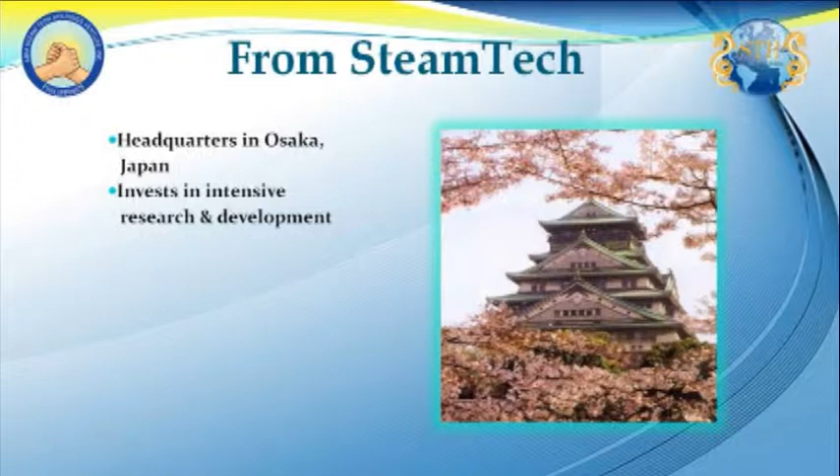From SteamTech, our headquarters is in Osaka, Japan. We invest in research and development to come up with excellent products which can help maximize the efficiency of your daily operations, and environmental problems will be addressed as well.

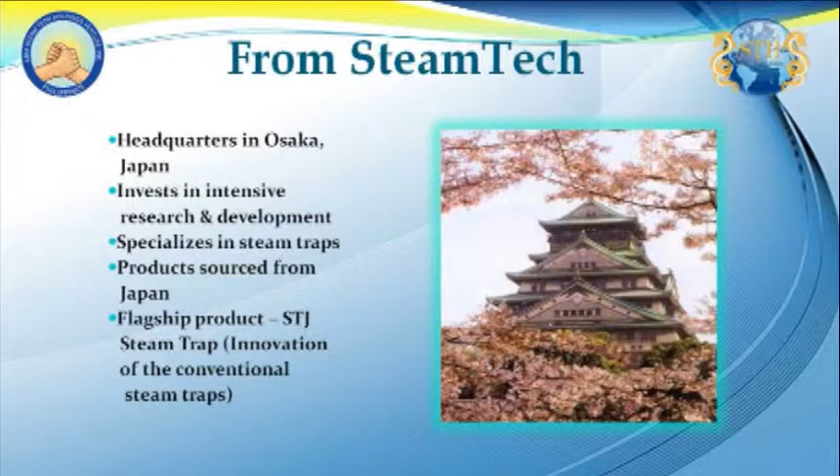We specialize in steam trap. Definitely, the product is being sourced from Japan. Our flagship product is STJ Steam Trap, the innovation of conventional steam traps that are being used in industrial settings nowadays. To begin with, we would like to give you a basic idea where the steam traps are being used.

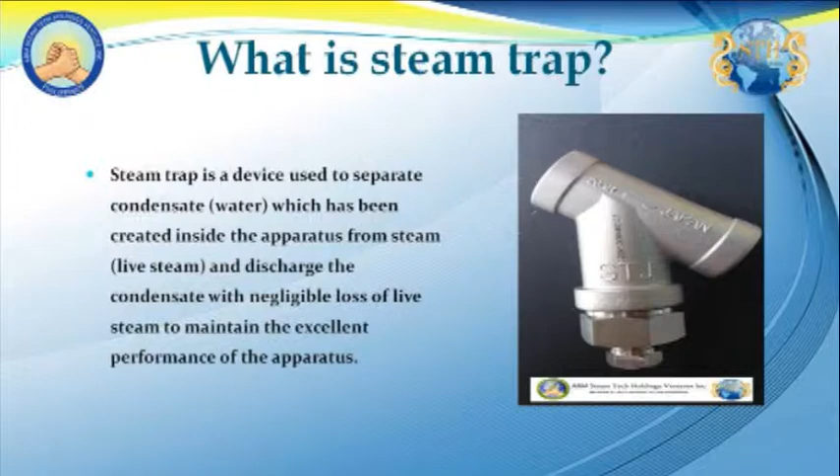First, we need to define what does it mean by steam trap. Steam trap is a device used to separate condensate or water which has been created inside the apparatus from steam or live steam, and discharge the condensate with negligible loss of live steam to maintain the excellent performance of the apparatus. Where can we find steam traps?

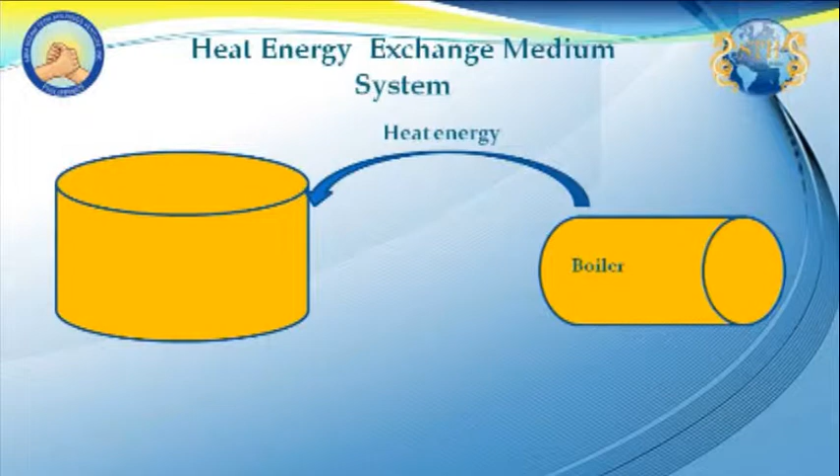Mostly, these can be found in the companies that are using boilers as a source of heat or vaporized fluids. Usually, steam is being produced in a boiler and can be used for any purpose the company might produce in the manufacturing process section. During the manufacturing process, live steam may turn into condensate.

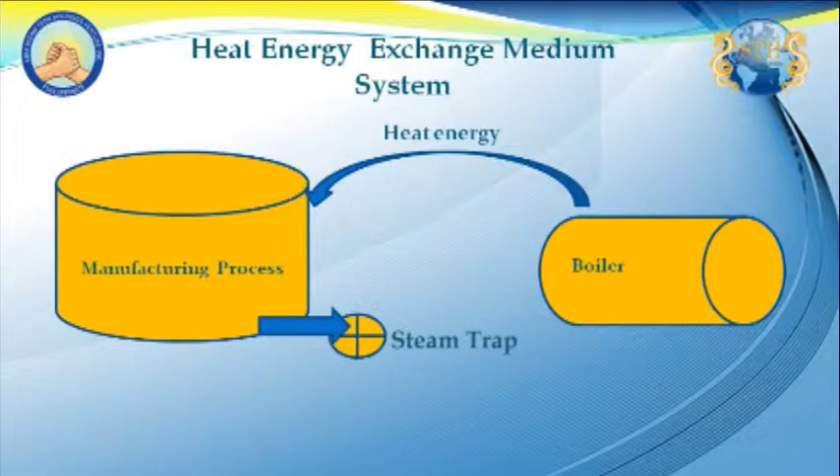Why do we need to remove the condensate as soon as it is formed? To mention a few, we need to maintain the temperature of the process to produce a quality product. Also, to avoid staining or corroding of piping, which can cause too much headache with the maintenance people in the plant, and to avoid mold formation inside the piping, which later can damage the steam pipes. Of course, to maintain the excellent performance of the apparatus.

Before I introduce our steam trap technology, I will give you a basic idea of the different kinds of conventional steam traps. We have here the disc type, free float type, bimetal type, and bucket type. What do these steam trap types have in common?

They have complicated moving parts at an average of 6 times a minute. How many movements should it be in 1 hour? 1 day, 1 week, or a month? And a year? This has a huge contribution to the deterioration of the steam traps, and sooner you are going to change and buy a new steam trap as a replacement.

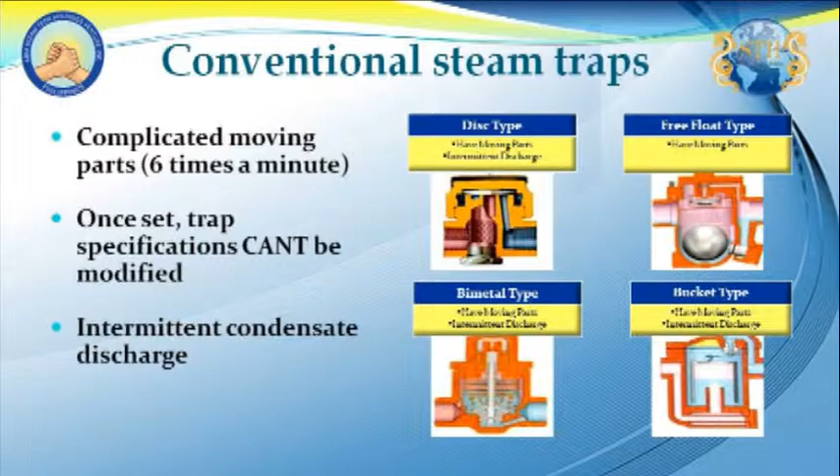Second, once these steam traps are set, specifications cannot be modified, whatever the amount of condensate it drains out. Third, they have intermittent condensate discharge, because you need to wait for the bucket to get full, you need to cool the metal down, then drain the condensate out. More likely, the same concepts apply to other steam trap types.

In addition to that, high steam wastage will occur. This is when the trap valve portion is activated or opened. The outlet opens unnecessarily larger, and live steam staying behind the stagnant drain leaks out before the valve closing. The bigger the safety rate is set, the larger the volume of steam leakage occurs.

This will result in a shortage of steam volume supplied to the manufacturing process section, and the equipment temperature will decrease, which can cause product defects. In this case, to maintain the volume of steam, you need to supply more steam from the boiler by burning more fuel, where you lose a huge amount of money buying more fuel. This is where the unseen additional steam production cost reflects. Also, the leaked steam will become drained at the secondary side and disposed of or circulated into the water supply tank.

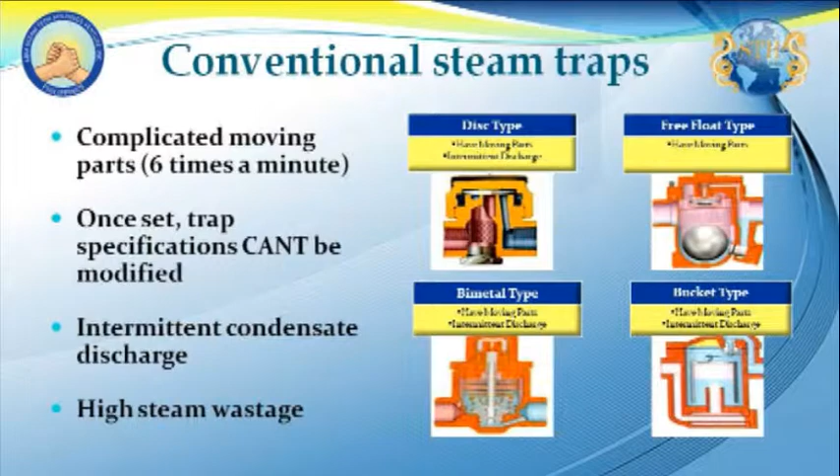Steam leaked is unnecessary energy that was not utilized and considered a cost for the company. Because of these problems, we are here to help your company save. We are introducing the STJ Steam Trap technology, which can be very beneficial to your company in many different ways.

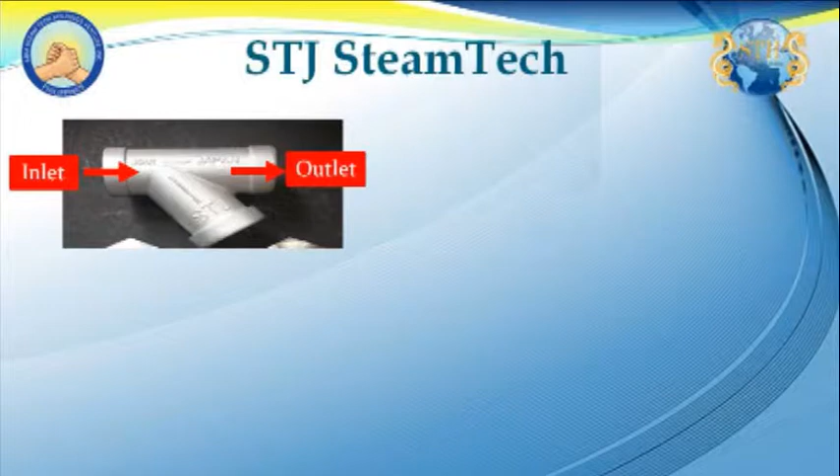The inlet part, where the high pressurized live steam enters together with the condensate, then passes through the strainer to filter any impurities before it passes to the nozzle. In the nozzle, live steam is separated from condensate by retrieving the live steam and draining the condensate out continuously on the secondary side. How does this happen? We will definitely understand the principle as we continue with our presentation.

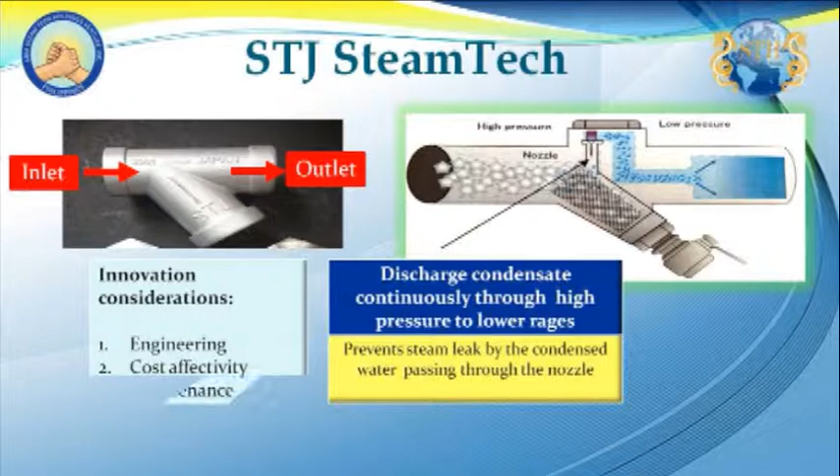Why did we innovate steam traps? These are the considerations we accounted for: engineering, cost effectivity, maintenance, and environment. To answer the principle, we use why the condensate is being drained out continuously and retrieving the live steam completely.

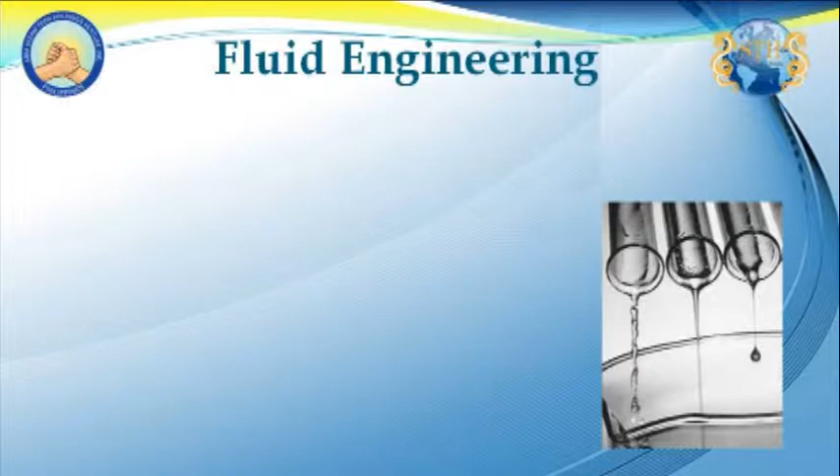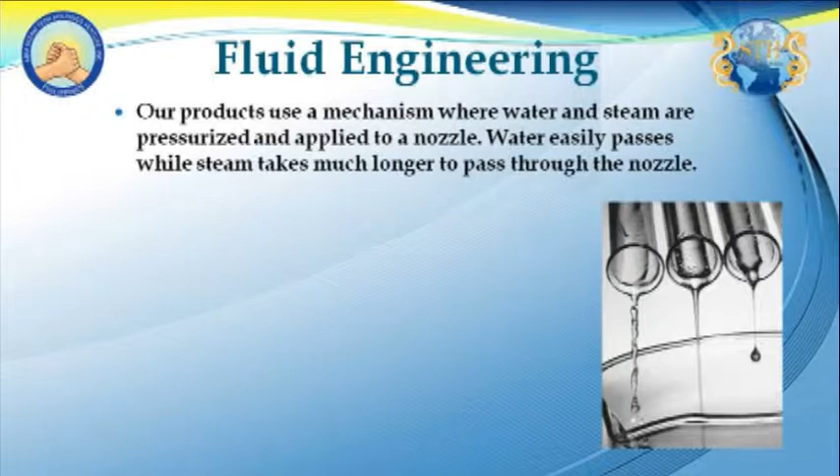Our technology uses a mechanism where water and steam are pressurized and applied to a nozzle. Water easily passes while steam takes much longer to pass through the nozzle. We are using the application of fluid engineering method by harnessing the properties of fluids involved, which are steam and water. These properties are kinetic viscosity, temperature, and pressure.

Any fluid, for example gas or liquid, has viscosity. The kinetic viscosity and temperature greatly affect or influence viscous fluids passing through a circular tube. It is harder for the fluid to pass through as the viscosity increases. At 100 degrees Celsius, the kinetic viscosity of saturated steam is 70 times greater than water. That means it is 70 times harder for the steam to pass through the circular tube than water.

Note that the above mentioned principle is verified by experiment when steam and water pass through a tube independently. However, in a venturi nozzle or a small tunnel, both water and steam enter together. The flow of steam is interfered with by the water reaching the nozzle, and it becomes even more difficult for the steam to pass through. The loss of steam is decreased up to 50% because we can carefully adjust the pressure.

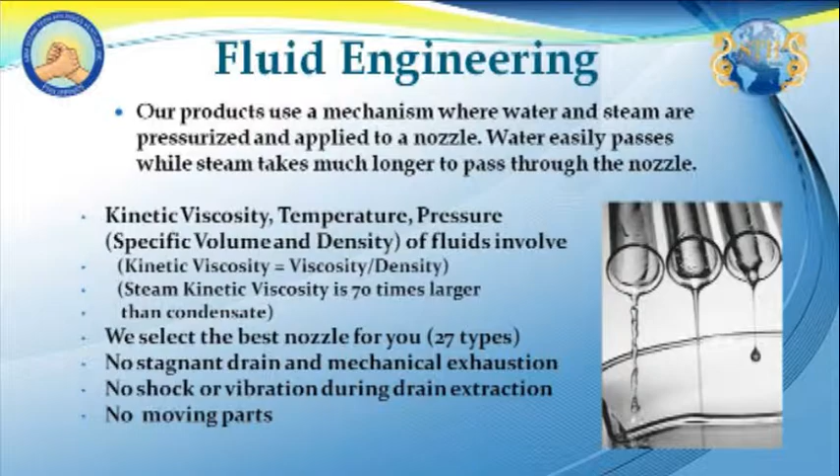Effective for any old existing apparatus of which the steam consumption is unclear. No stagnant drain and mechanical exhaustion because the condensate water is continuously and steadily exhausted without any moving parts. No shock or vibration during drain extraction, which would cause troubles to the piping system. The STJ trap is friendly to piping systems because of continuous discharge.

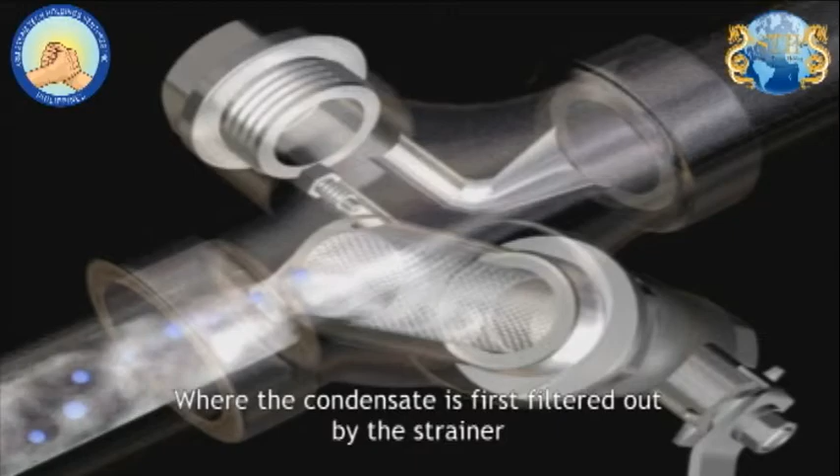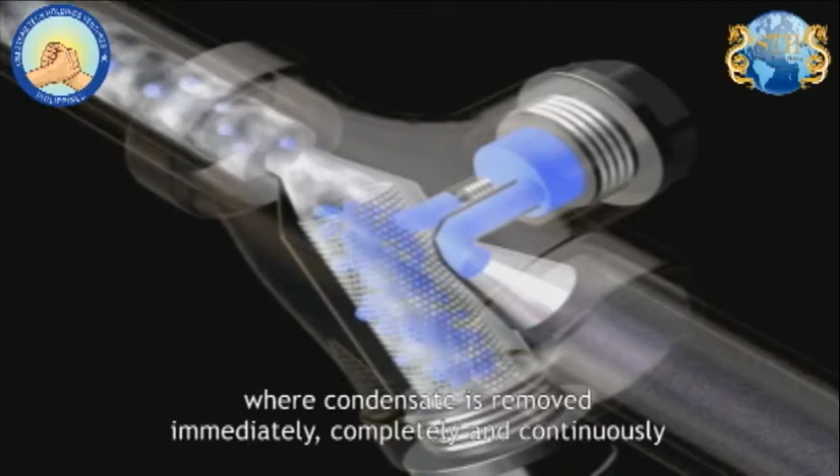Steam and condensate enter the SteamPro condensate removal device, where the condensate is first filtered out by the strainer. The filtered condensate continues to be pushed out by the steam, which enters SteamPro's customized Venturi nozzle, where condensate is removed immediately, completely, and continuously, with minimal steam loss, and any accumulated debris can be flushed out through the blow-off valve.

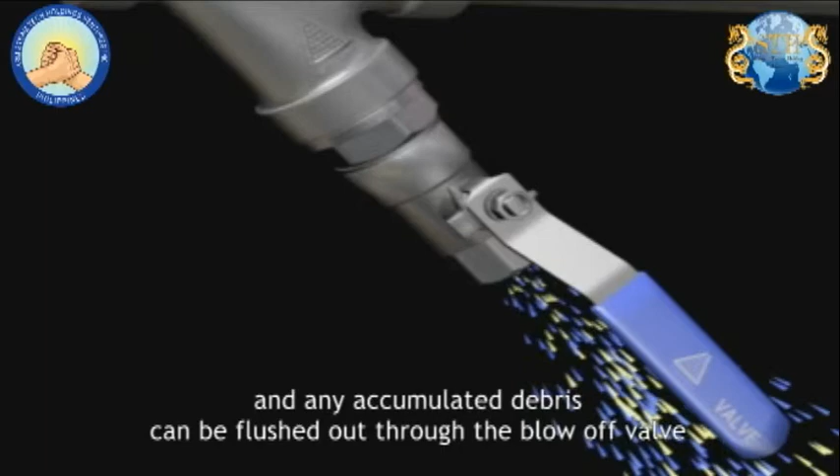The second factor that we consider is cost effectivity. Considering the graphs on the presentation, the color red represents steam leakage. On the first graph, there is regular replacement of steam traps. At the start of operation, steam leakage is minimal. However, due to the complicated moving parts which contribute to the immediate deterioration of the steam trap, the steam leakage is increasing until the date of replacement, and you need to increase fuel usage to maintain the volume of live steam in the manufacturing process section. This means you are also increasing the amount of money to buy more fuel. The cycle repeats as another replacement takes place.

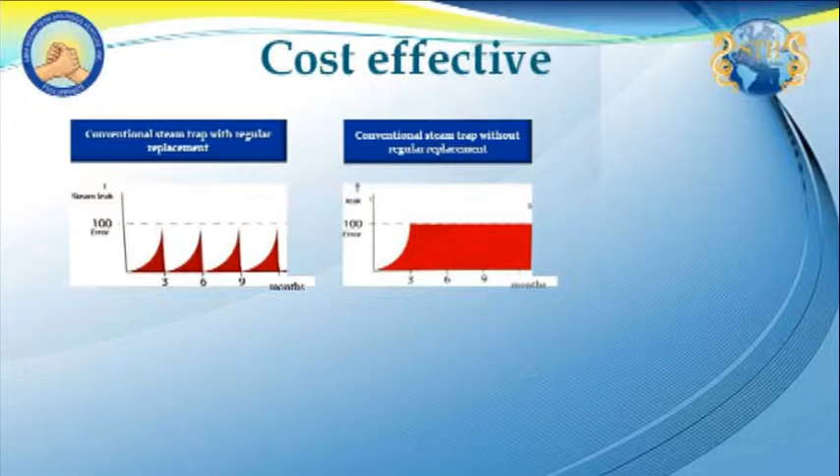The second graph shows what happens if the company decides not to replace the steam traps. However, the third graph shows that from the start of operation until the end, there is no steam leakage. The company is able to optimize the usage of live steam. A reduction in steam consumption is expected, and you don't need to buy more fuel to maintain the volume of live steam entering the manufacturing process section.

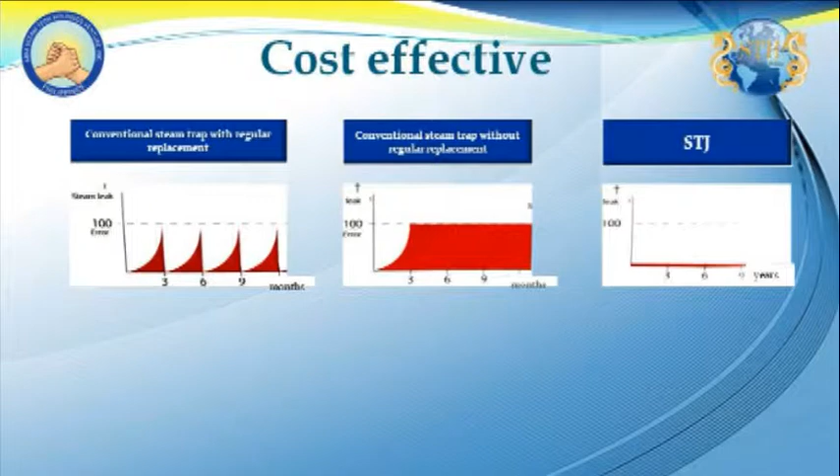In this case, you save more money, resulting in greater profit. Through the years, STJ has no age-related deterioration. Here is a sample of fuel savings using the STJ steam trap. The data was provided by one of our clients, who were very happy to send us the results, gathered and generated for the year 2013.

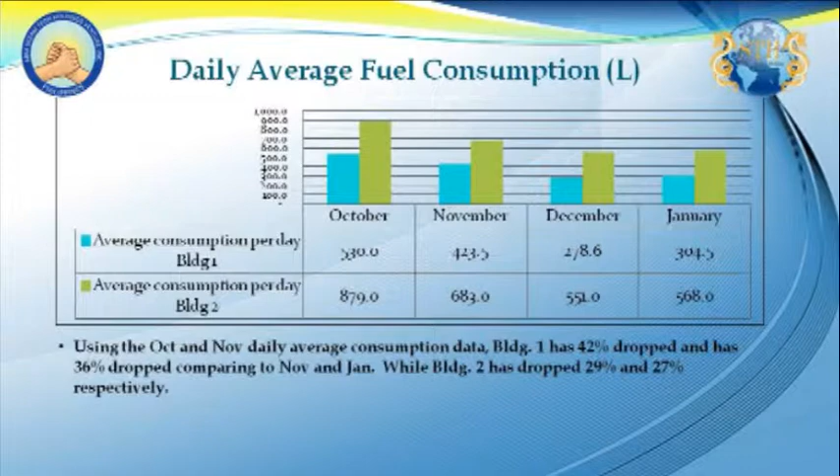If we check the average daily fuel consumption of Building 1 for the month of October, the company used 530 liters of fuel, and 423.5 liters for November. However, for the month of December, it dropped to 278.6 liters. This means the company was able to save 34% of their average daily fuel consumption compared to November and December. Take note that the STJ steam trap installation was done on November 24, 2013.

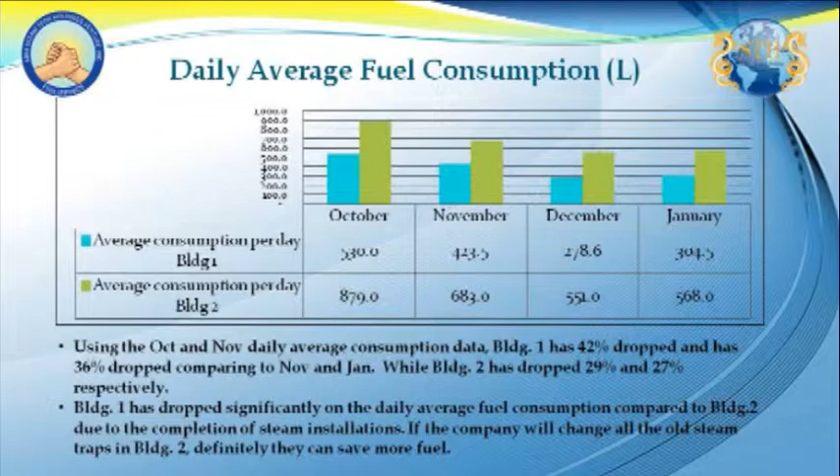The same goes for Building 2, however the figures are different because the steam trap installation in Building 2 was incomplete, unlike Building 1 where we replaced all the steam traps. If all the steam traps in Building 2 were replaced, the company could definitely save more.

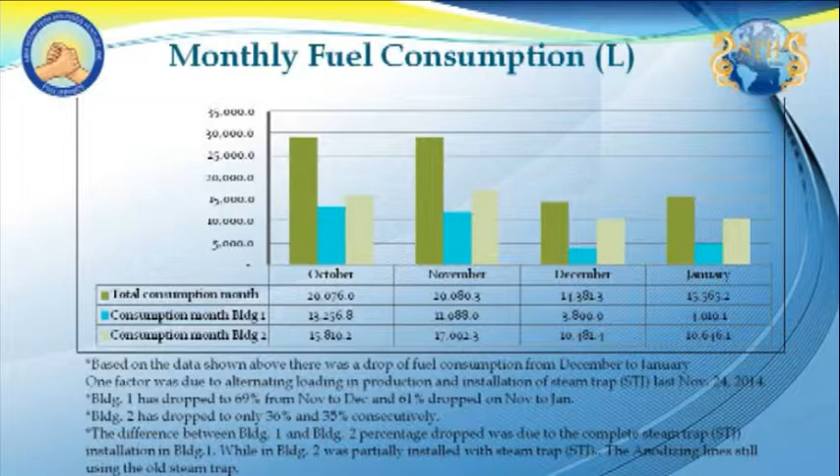Let us look into their monthly fuel consumption. For the month of November, their fuel consumption was 29,080 liters, and it dropped to 14,381.3 liters for December. These figures show the total consumption combined for Building 1 and 2. The data shows that there was a 50.54% fuel savings for the month of December.

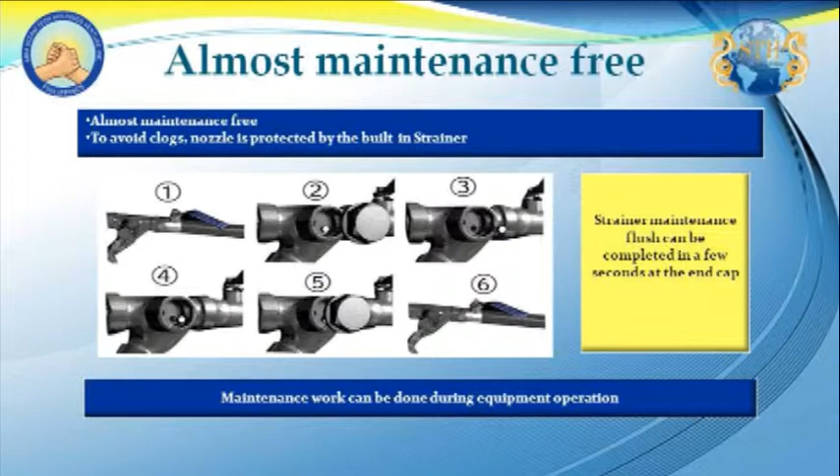The third consideration is the maintenance aspect of the company. Our steam trap is designed so that cleaning can be done by one-touch operation at the outlet of the strainer, without stopping the steam production line, by opening the ball valve in just a few seconds. It's almost maintenance free. The final consideration our company looked into is the environment.

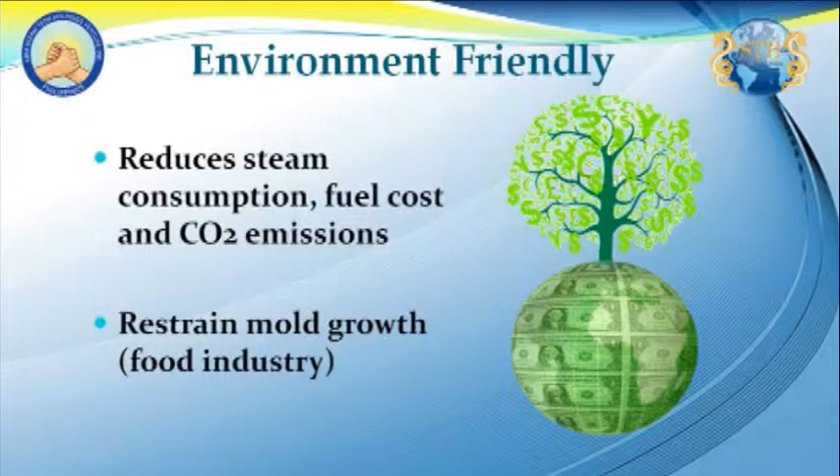Since there is no or minimal steam leakage, companies using this technology can optimize the use of live steam generated from the boiler, resulting in reduced steam consumption, reduced fuel cost, and reduced industrial waste in the form of carbon dioxide emissions. Therefore, a cleaner environment can be attained. In the food industry, mold growth will be restrained due to the continuous discharge of condensate.

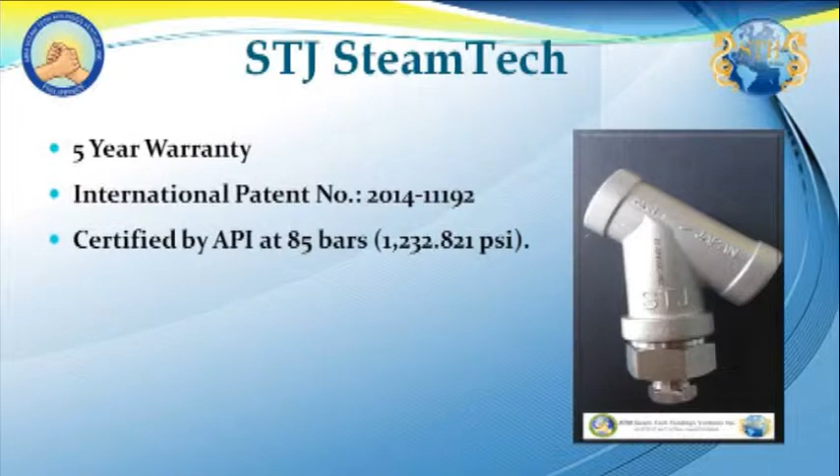STJ SteamTech has a 5-year warranty with international patent number 2014-11192. We are certified by API up to 85 bars. We are also insured by Tokyo Marine and Nichido Fire Insurance Company Limited up to $1 million per piece of steam trap.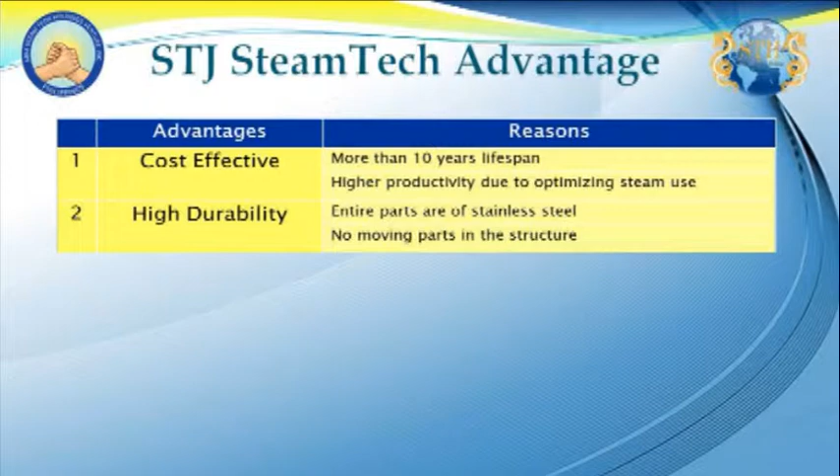First, it is cost effective because it has a lifespan of more than 10 years without any age-related deterioration, and higher productivity due to optimizing the usage of steam, resulting in reduced steam consumption and fuel cost. Second, it has very high durability because the entire parts are made of stainless steel with no moving parts.

Third, low maintenance, because you can flush clean the strainer or piping at any convenient time, reducing management cost. Fourth, this steam trap is easy to install by inserting the bypass route in front of the existing trap, finishing diagnosis in 30 minutes.

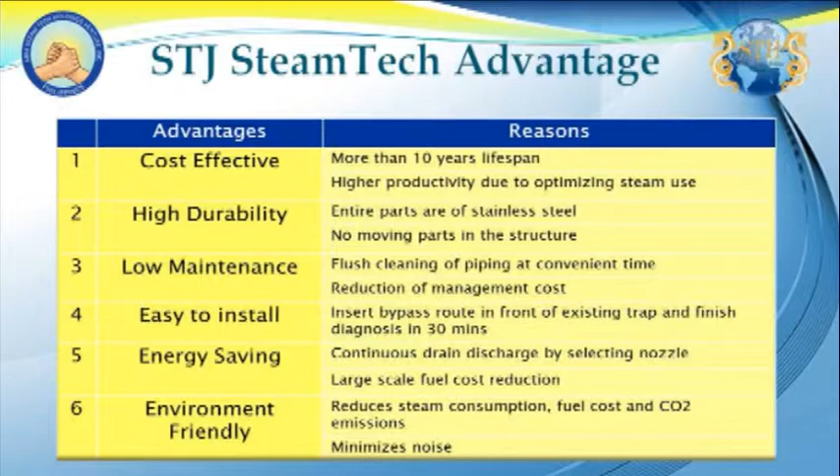Fifth, we can achieve up to 50% energy savings by optimizing the usage of steam, resulting in reduced steam consumption from the boiler and reduced fuel cost. Lastly, this technology is environment friendly because of no steam loss. We optimize steam usage resulting in reduced fuel burning, fuel cost, and carbon dioxide emissions. In the food industry, mold growth is restrained due to continuous flow of condensate, and noise pollution in the plant is also reduced.

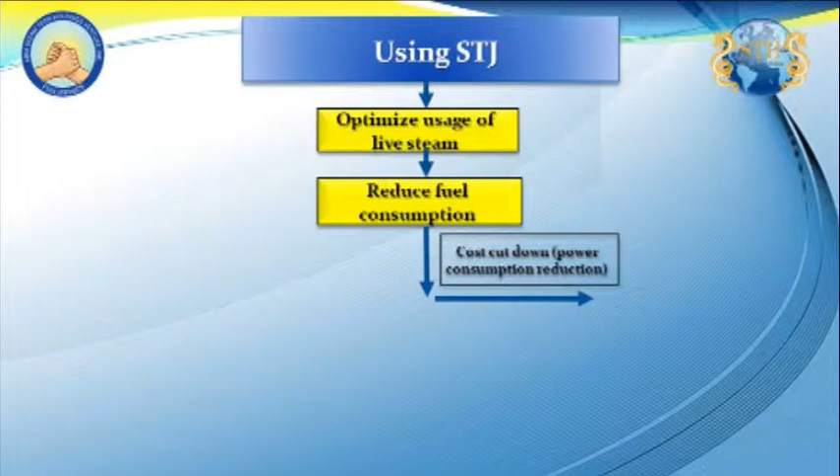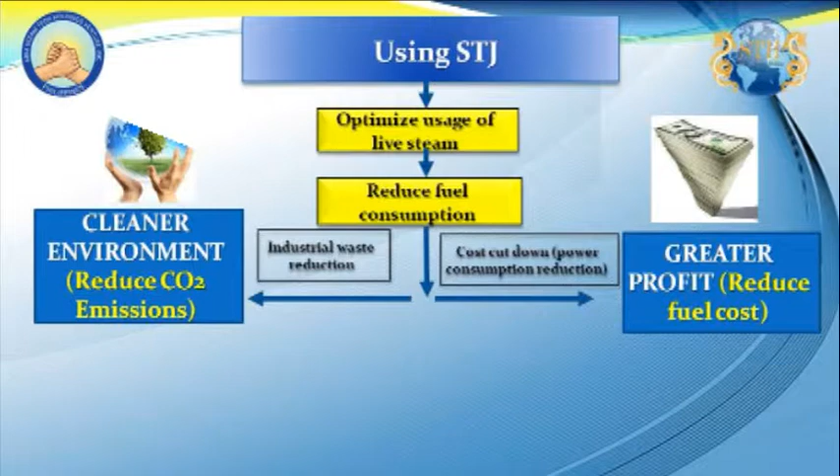To summarize, using STJ steam technology, companies can optimize the usage of live steam generated from the boiler. This can reduce fuel consumption and fuel cost, resulting in greater profit. In addition, there is a reduction of industrial waste in the form of carbon dioxide emissions, helping achieve a cleaner environment. Therefore, we can achieve 15 to 50% in energy savings.